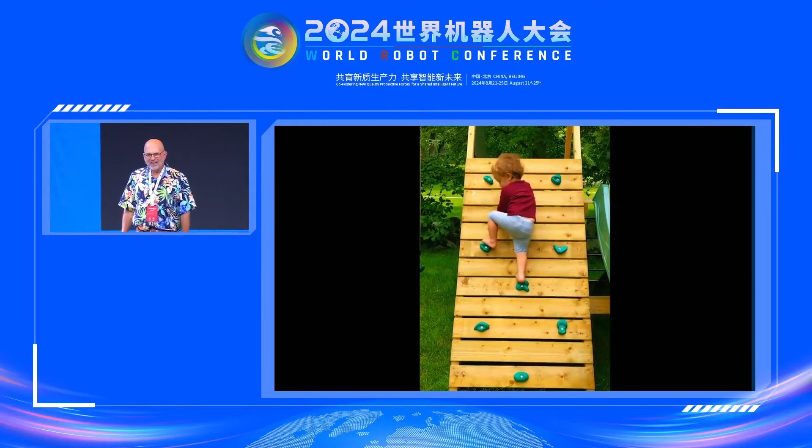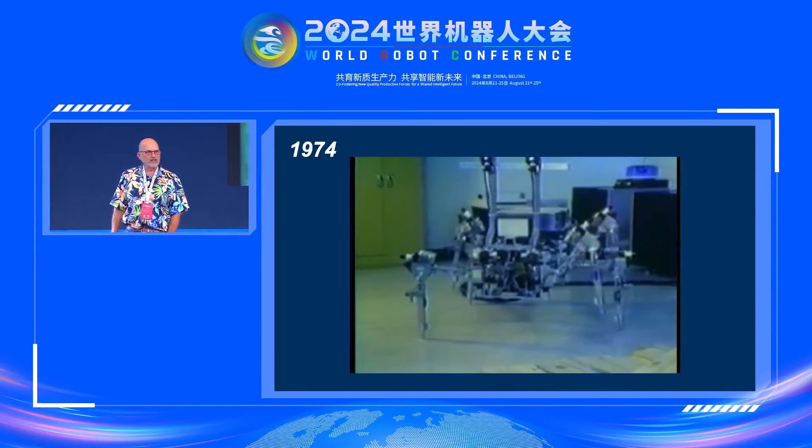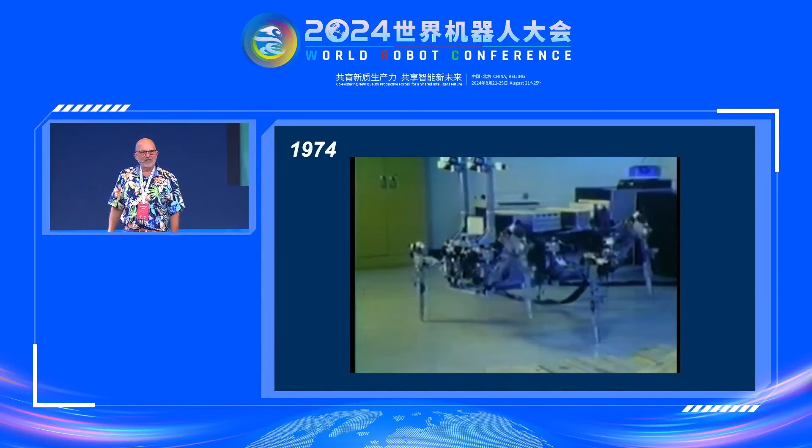I got started about 50 years ago, and I went to a conference when I was still a graduate student and saw this robot, and it's an inspiration. It was an inspiration not because its mobility was so good, it's because it was so terrible. And I looked at that robot and said, wow, they have it all wrong.

Because animals fly through the air, they don't balance statically. Animals have kinetic energy when they move. They don't limit their speed so that that's not a factor.

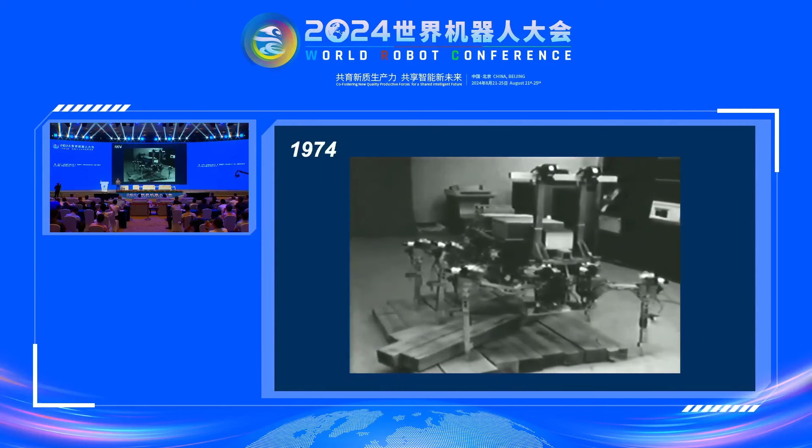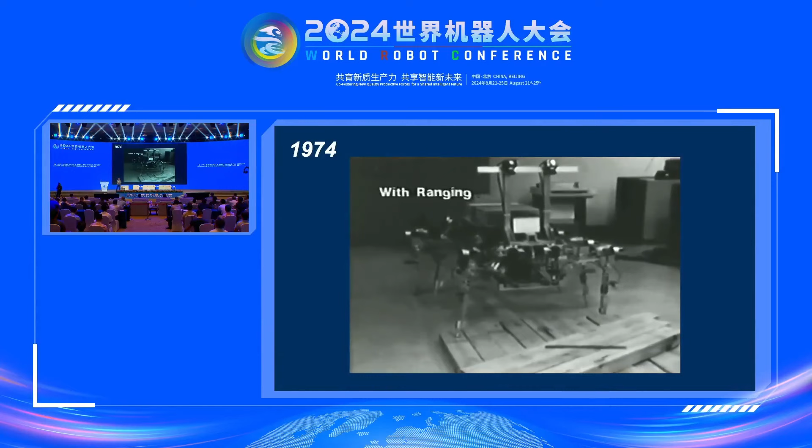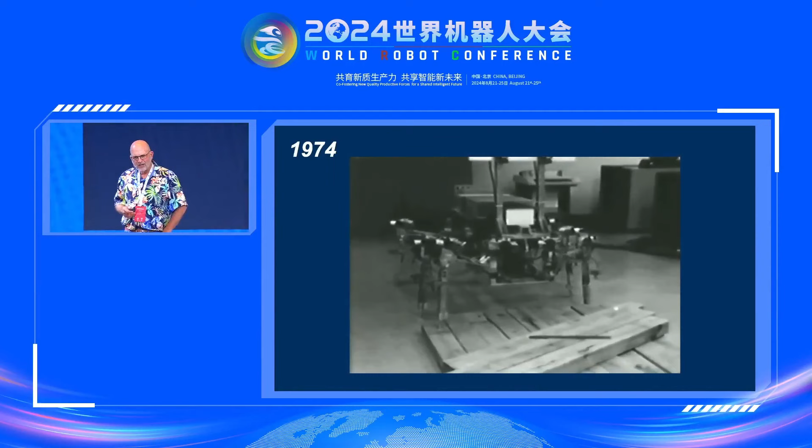And I thought, well, maybe having 6 legs and 18 joints was too much of an impediment. So I decided, I'm a little bit of a contrarian. A contrarian, if a contrarian hears white, they think black. If a contrarian hears up, they think down. So I thought, okay, 6 legs, 30 million possible gaits. Maybe we should make machines that just have 1 leg.

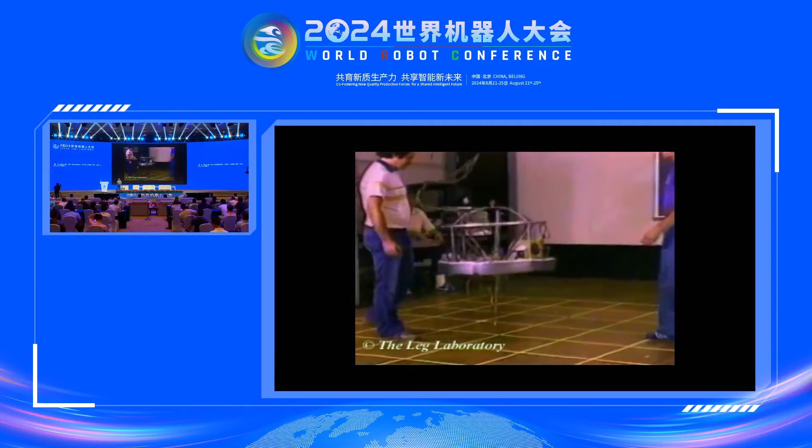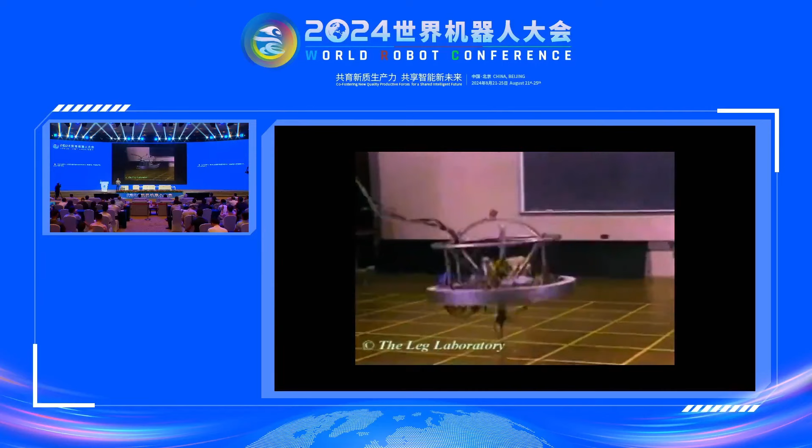With a machine like this, you can't avoid balancing. There's only 1 gait, so you don't have to think about how to coordinate the behavior of all the legs in order to get those gaits. But you do have to think about balance and dynamics and control. And that's what we did here.

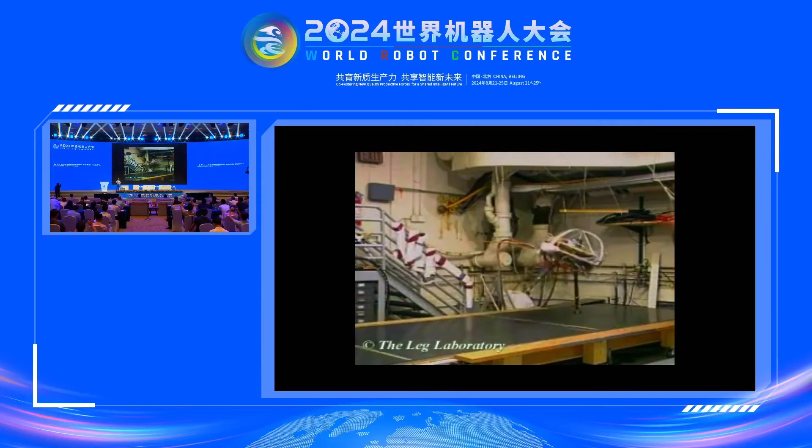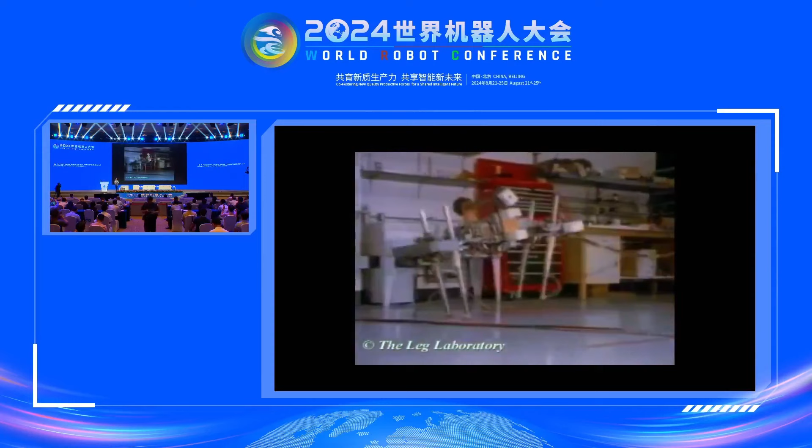It turns out that if you can make a pogo stick balance, you can make a 2-legged pogo stick balance, do some tricks, and you can make a 4-legged robot that has dynamic behavior. This was back in the mid-1980s, the early 1980s. Of course, there's hoses, there's an off-board computer in the next room because we didn't have the integration, the miniaturization that we have today. But we certainly were able to get at some of the fundamentals of what locomotion in a dynamic system could be.

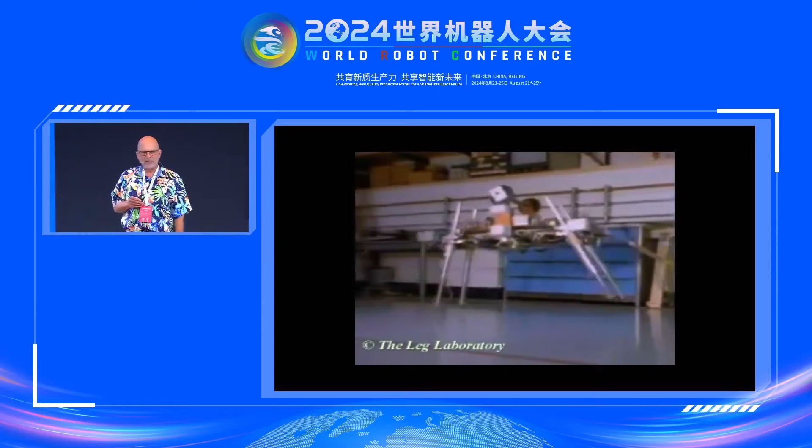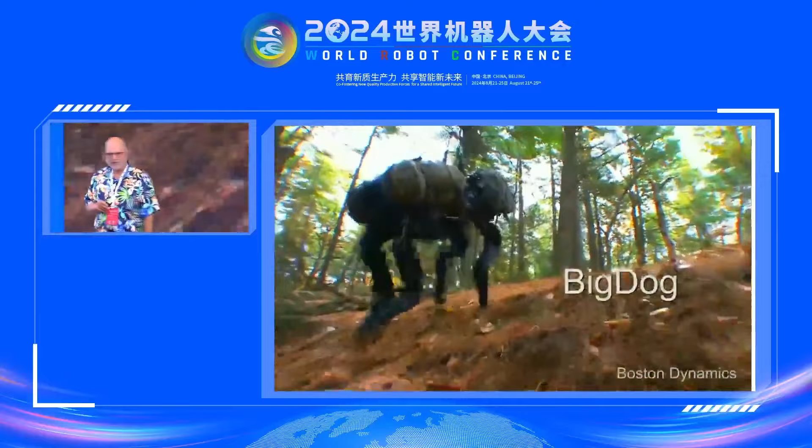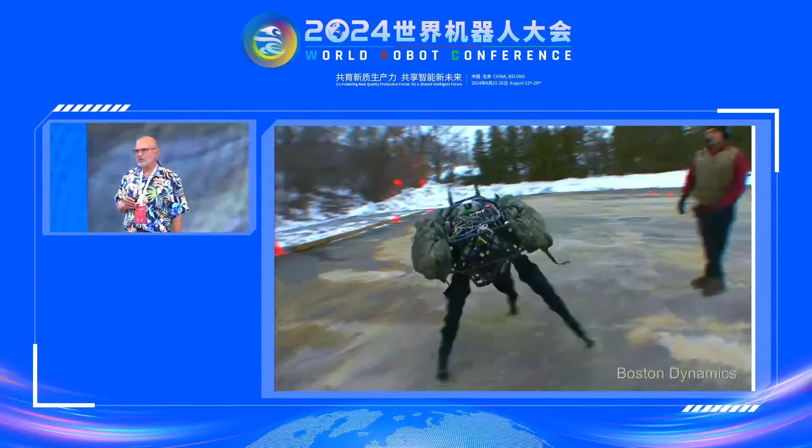And I think those ideas have powered us ahead for the intervening years. Most of you are probably familiar with BigDog. I'm not going to really talk about BigDog today other than to show this one clip. But it's a robot that doesn't have pogo stick legs, but it uses many of the same principles and ideas. Even to this day, we're using some of the ideas that came out of thinking in a contrarian way. I think there's lots of opportunities for contrarian thinking in taking robots the next step.

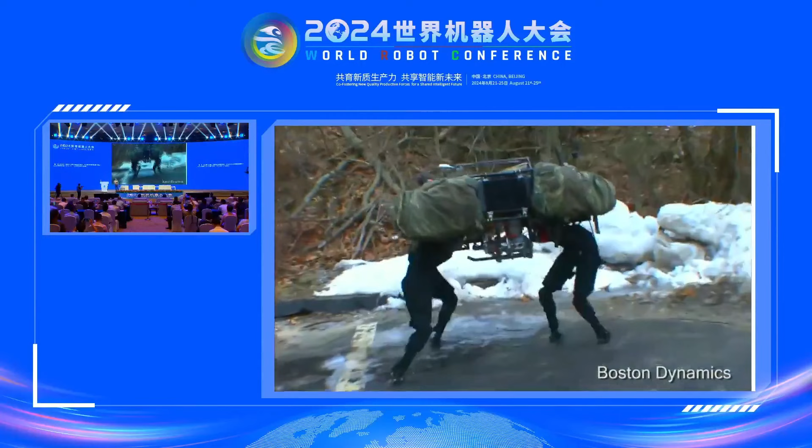So up until recently, almost all the work I did focused on what I call the athletic intelligence of robots. That means controlling the physicality of the robot, keeping it balanced if it has to balance, controlling its energy, giving it mobility, having real-time interaction with the world and with obstacles or adversaries.

But obviously for human beings and for animals, there's another aspect to our intelligence. And I think we could simply call that cognitive intelligence. You know, we think of cognitive intelligence as happening in our heads, doing things like making a plan.

I had to go to the airport in order to take my flight to come to Beijing. I knew that the traffic was going to be busy, so I had to leave an hour for that, had to arrive at the airport 2 hours early. Anyway, you can take a situation like that and use your head. You don't have to use your body to make a plan like that. Just you sitting here and listening to me talk, you're using your cognitive intelligence to understand the words I'm saying or the interpreter's words, and then relating them to things you know about in your lives.

About 2 years ago, I started a new organization called the AI Institute that's committed to combining athletic intelligence with cognitive intelligence. At the time I was proposing this, it was before ChatGPT's impact on all of our thinking in the world. So I don't know if we're catching the wave or being drowned in the wave of excitement about foundation models and LLMs.

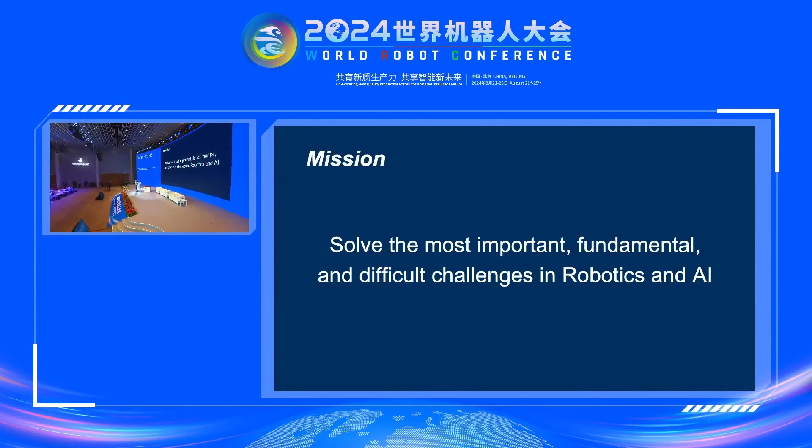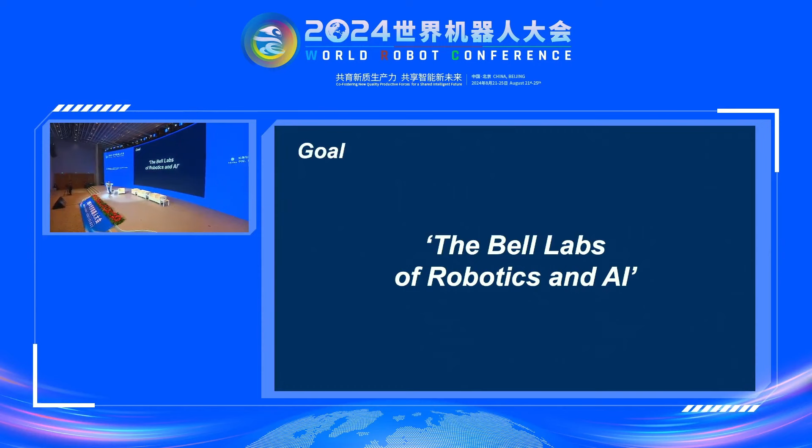I don't know if in China Bell Labs is very popular, but in the United States, everybody thinks of Bell Labs as a place where you're doing free-ranging thinking about the future and how to develop technology that gets you to the future. And I would love for the AI Institute to become that for robotics and AI.

We're focusing on 4 areas: athletic intelligence, like I've described and you've seen, cognitive intelligence, and hardware. I think it's unfortunate that for many people, all the focus is on computing, algorithms, and learning, and there's a kind of ignoring of how important hardware is. I don't think that's so true here in Beijing, China, but I think it might be true across the board with current thinking. So we have a strong focus on hardware as well as those other things.

And in today's day and age, ethics in society - how robots are going to fit in, what people's fears are, trying to make those fears be reasonable - I think is an important thing. So we have a group at the AI Institute focusing on that as well.

We have a lot of projects, and I don't have time to go through them all, but I'm going to give you a little sampling of the things we're working on.

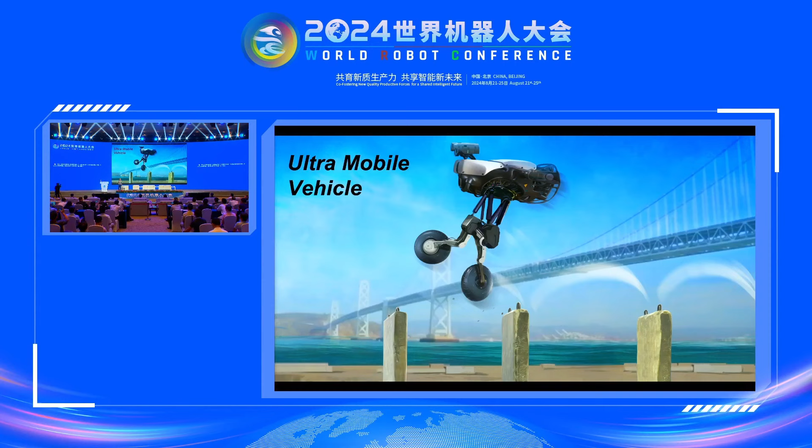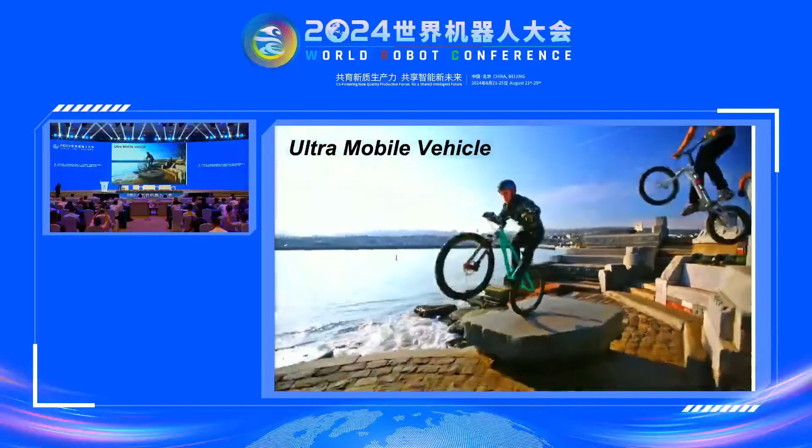One thing that's mostly in the athletic intelligence category is building an ultra-mobile vehicle. And the inspiration for this, again, comes from human behavior. It's really remarkable what a human can do with a bicycle. I know you're supposed to just pedal them and ride, but you can jump them and bounce them and use your body weight and balance and use your perception to plan the motions you're doing. So this is our aspiration, to be able to do this kind of maneuver.

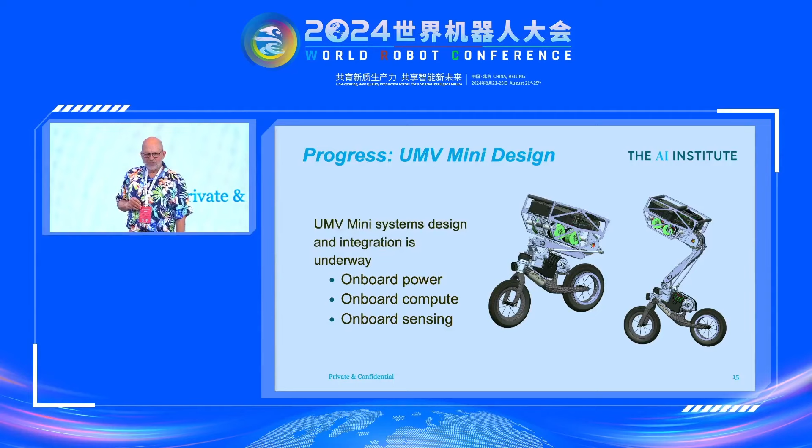And we're just getting started. In fact, most of the stuff I'm going to describe at the Institute, because we're only 2 years old, is at the fledgling stage, not at the high-performance stage. We've designed some machines that let us explore this, and here's some early footage of these machines.

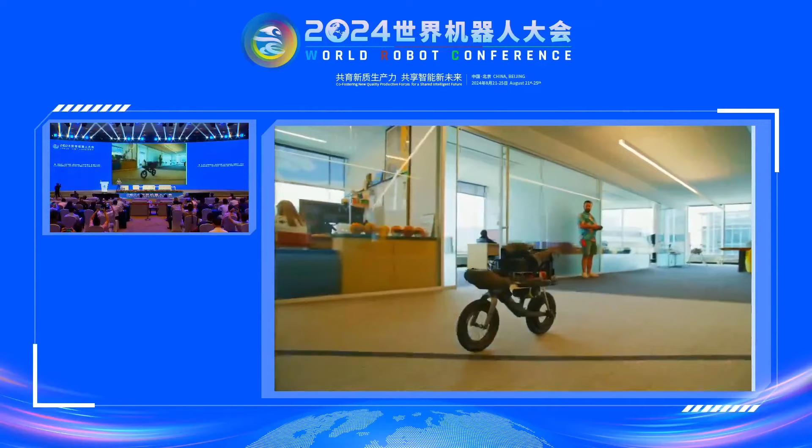Here's a little bicycle that can balance itself. We actually got a stock bicycle and added our own computers and actuators in order to develop behavior of this bicycle. So this is the balancing part of the bicycle.

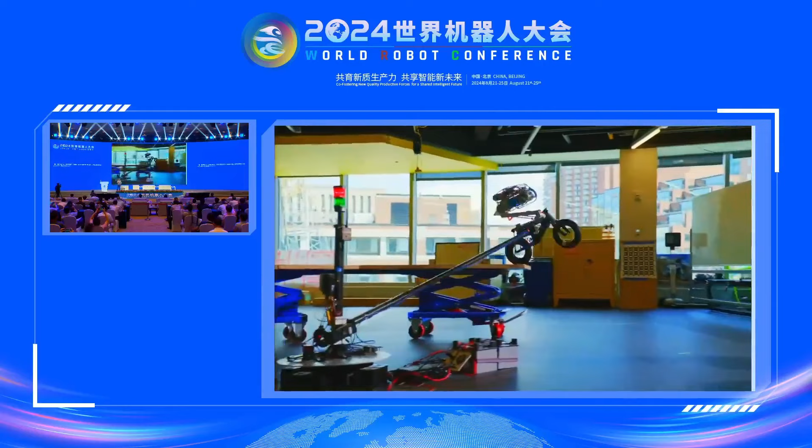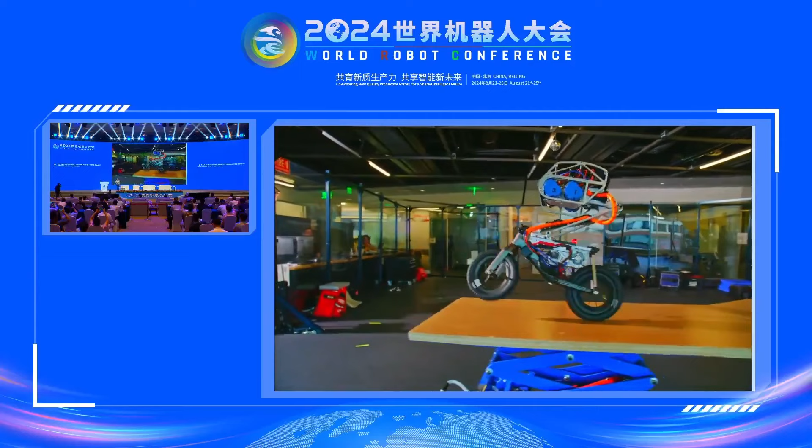But we also want to make it possible for it to jump. So here we've been experimenting with the jumping part of the bicycle. There's a mechanism attached to the body, which you can think of as the body weight of the person riding the bike. We can throw that into the air or use it to absorb the energy of flight as the bicycle goes. We're also working on a 3D version of jumping, and eventually we'll take all these pieces and pull them together in order to make an ultra-mobile vehicle.

Obviously, there's a perception component and a planning intelligence component that have to be combined with those in order to make progress. We have another project called HALO, which stands for Human Athleticism, Learning, and Optimization.

This is being run by one of our people who comes from Marco Hutter's lab. Marco's sitting in the second row there, who is one of the pioneers in dynamic control and learning in robots. And I'm really excited about this project.

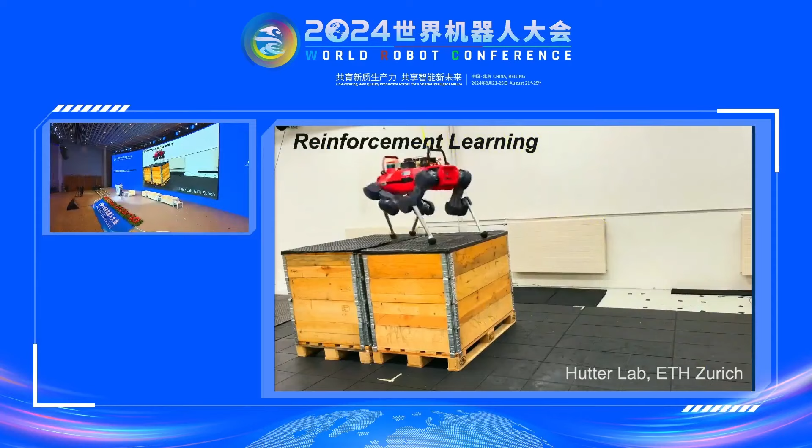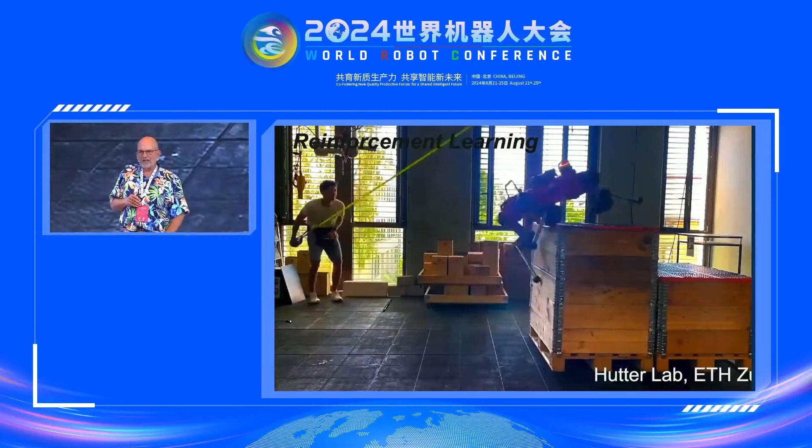This is a clip from Marco's lab that was done separate from the AI Institute, where reinforcement learning is used to control the behavior of this robot. And what I find so exciting is that the whole body of the robot is available to use in getting mobility.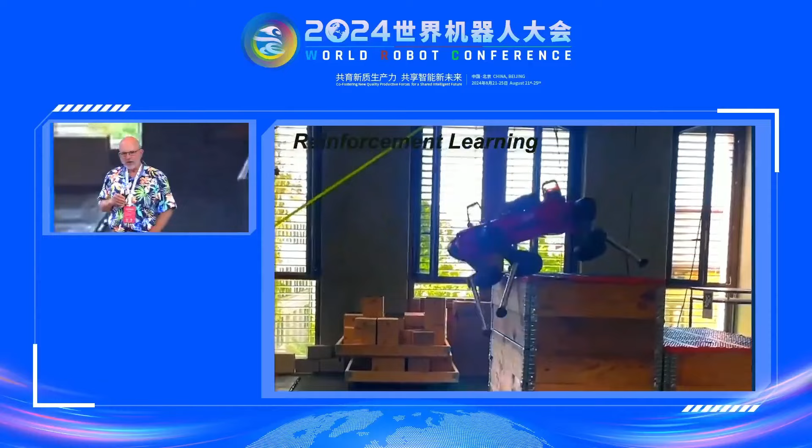It's not just the feet and the hands, if it had hands—it's using perception. And this was all trained in simulation using reinforcement learning. This robot can even go on rough terrain that's very irregular, using what it learned in a simulated world. In a second, you'll see how you can use massive simulation in an environment with various terrain features to build up the robot's capability to handle those features.

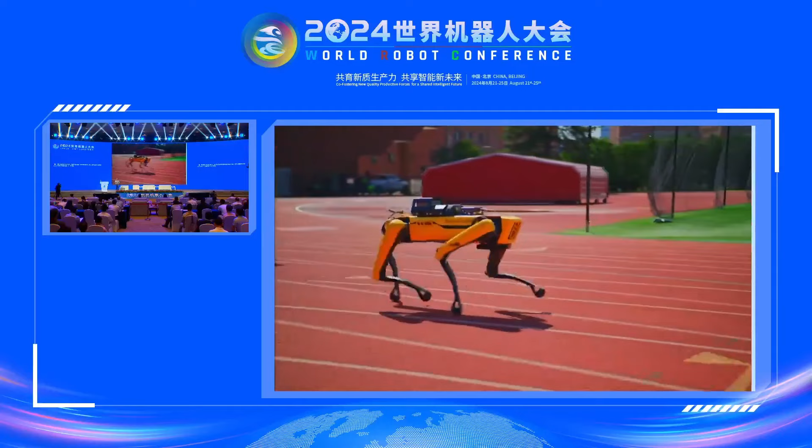We recently applied these techniques to the Spot robot. We got Boston Dynamics to open up a new low-level API for us that allows direct control, and we used the same reinforcement learning techniques to get this robot to run about twice as fast as the release software that's in Spot. I believe the software for this is all open source now, available through NVIDIA. If you want to know more, come ask me afterwards.

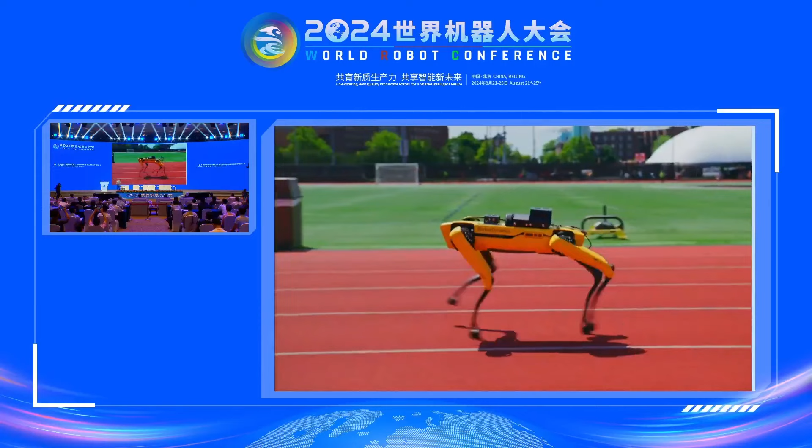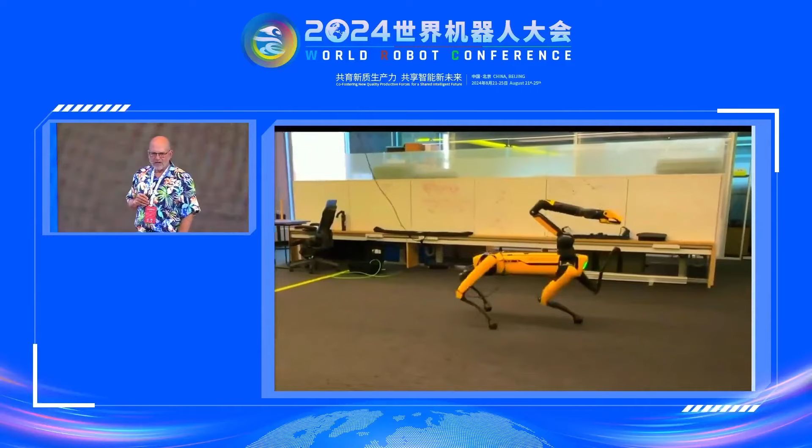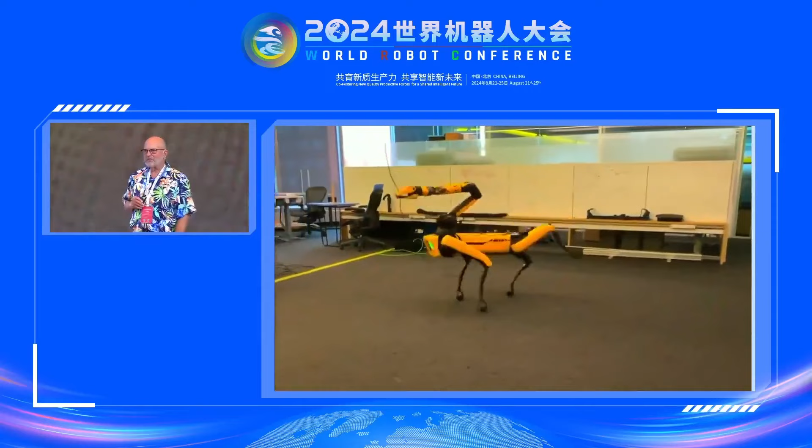Here's a different gait. We did a couple of experiments where the gait was fixed and we just optimized speed, but we also let the gait be flexible. Here's a case where we told the robot we wanted it to walk with 3 legs, not 4, so it could use its free leg to do manipulation. We haven't done manipulation yet, but I think it's really exciting that a 4-legged robot could actually do manipulation if you freed up its legs, even if it didn't have an arm.

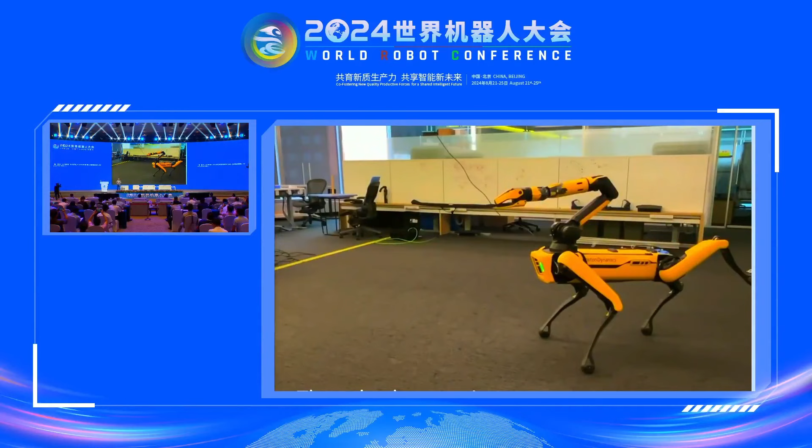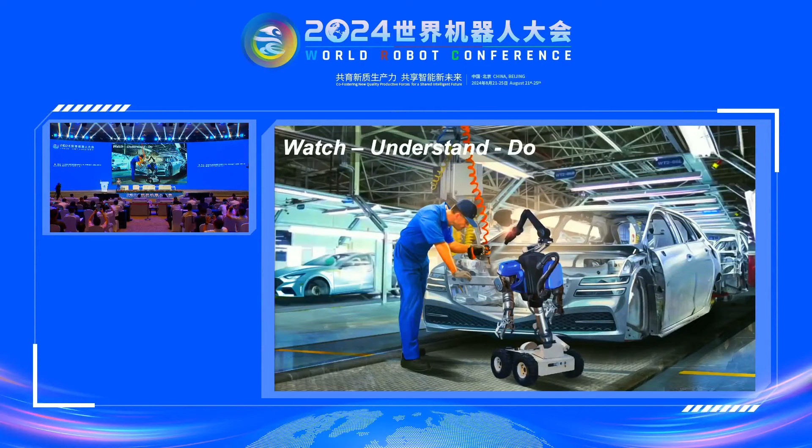I can remember a time at Boston Dynamics when we had a 4-legged robot and we could just barely get it to walk on 4 legs. So things have come a very long way since then.

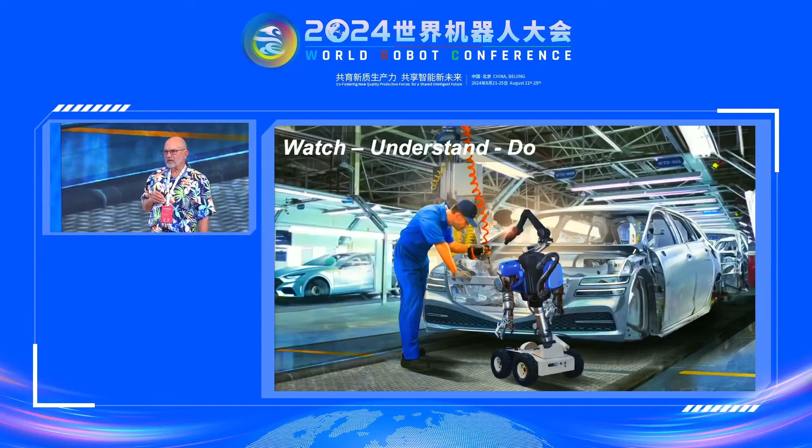One of our cognitive intelligence projects that we're working on, we call Watch, Understand, Do. The idea is not to have a room full of sophisticated programmers program the robot's task, but to let the robot watch a human being do the task in detail, understand what they're seeing, figure out what skills are involved, and then do the task themselves. Here's the robot doing the task.

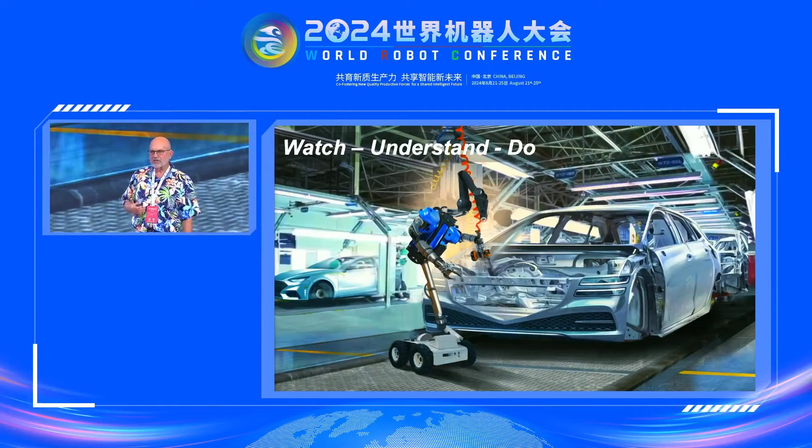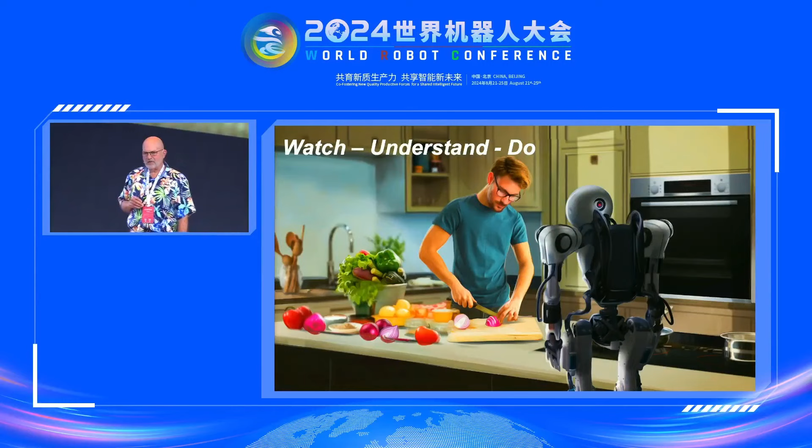Now, this is still science fiction, but I think with a combination of learning, foundation models, plus athletic skills, it's possible to make progress on a project like this. That previous slide showed an industrial application, but here's a domestic one, or at least a concept of a domestic one that could use the same kind of approach.

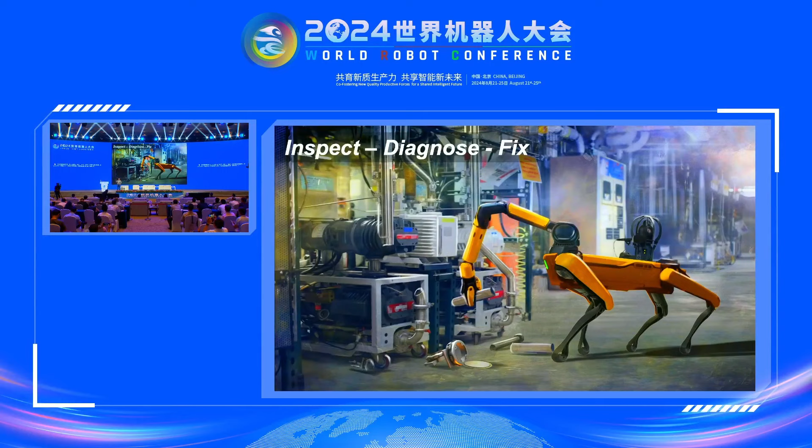We have an ethics and policy group whose mission is to collect real scientific data about some of the ethical issues. I think too much of the conversation about ethics and policy is driven by the media and by the fears—the Hollywood fears, the movie-making fears about what robots might be. I think there's an opportunity to learn more about what that could actually be.

I'm going to skip this because I'm low on time, and I want to give you a little update on Boston Dynamics.

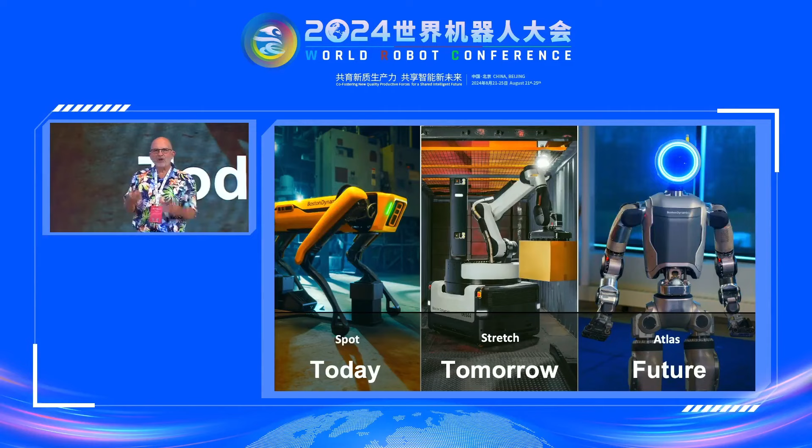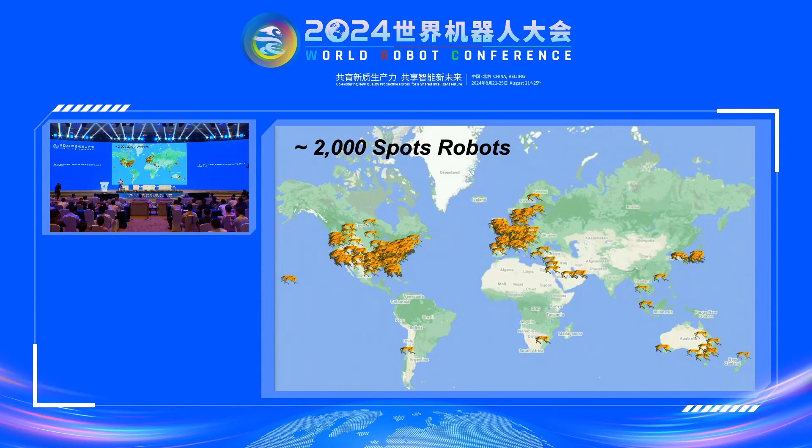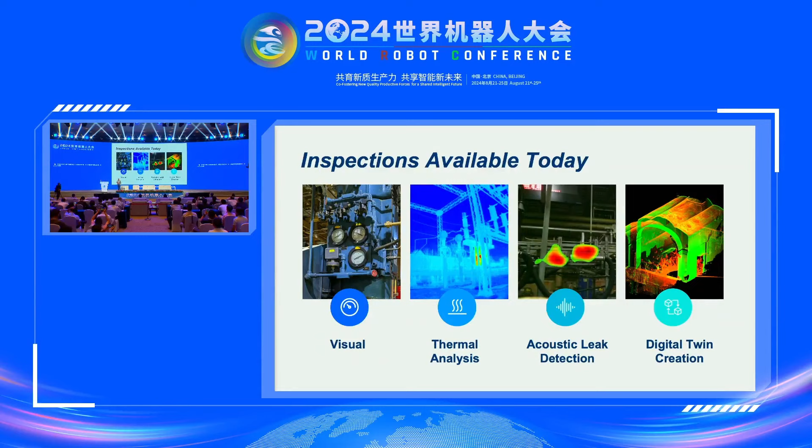At Boston Dynamics, they're working on 3 robots: the Spot robot, which is an ongoing product; the Stretch robot, which is in testing but will be a product very soon; and Atlas, the humanoid robot, which is probably most tuned in to this audience. There are about 2,000 Spots out there around the northern hemisphere of the world—not so many in the southern hemisphere, although there's some in Australia. They're being used for a variety of inspection tasks, research and development, digital twin creation, and things like that. It's really remarkable the wide variety of things people have thought up to do with these robots.

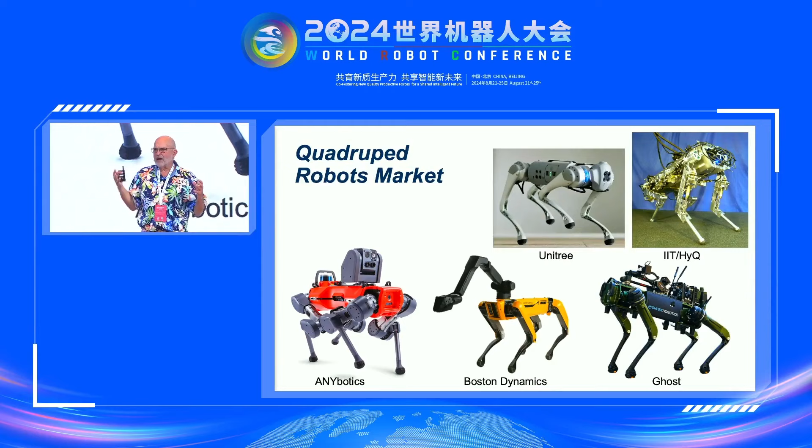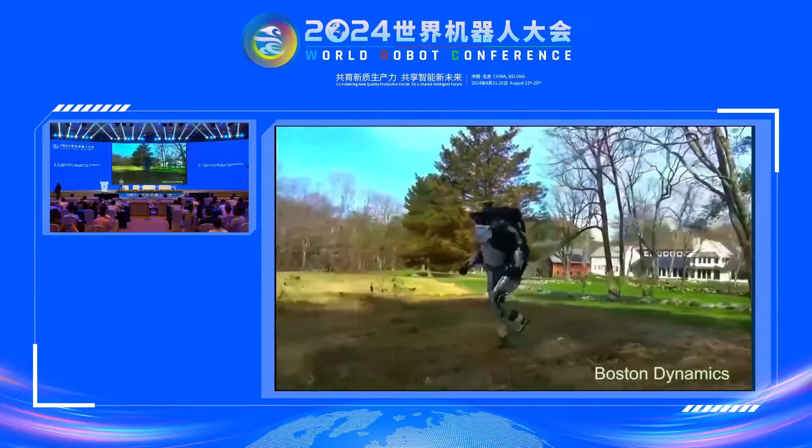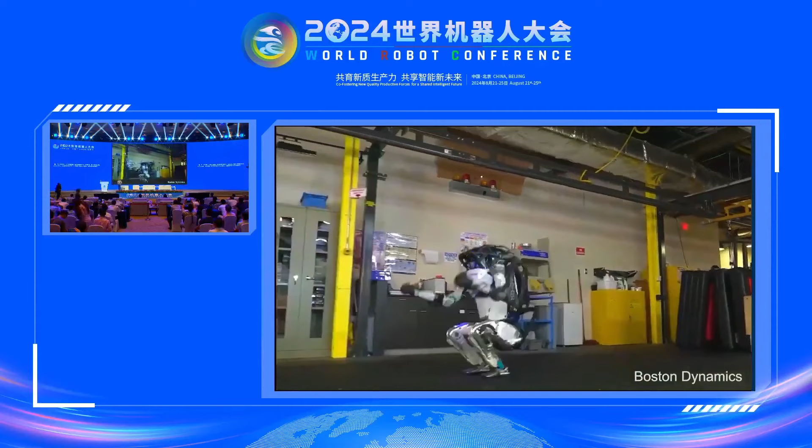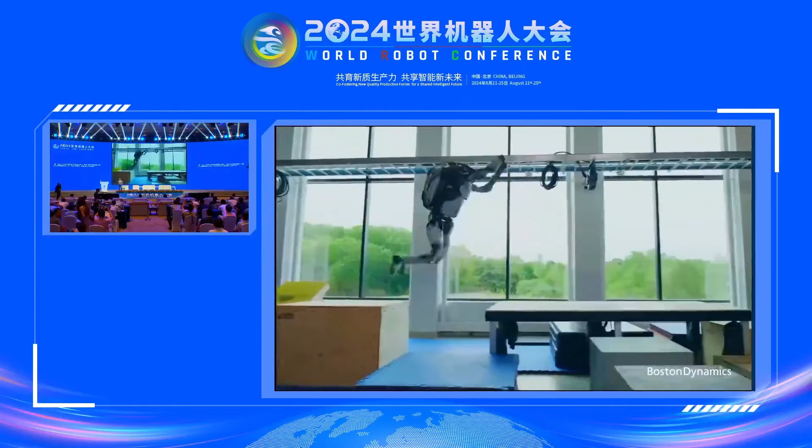We've been working hard on Atlas. Atlas is a humanoid robot developed at Boston Dynamics. This is footage you've probably seen before if you've followed us—it's a very athletic robot with a lot of skills. This one is hydraulically powered; the company just showed a small clip of the next generation, which is electrically powered. I'm very excited about the level of dynamic control used—this relies on model predictive control for much of its behavior, although they're starting to go beyond that.

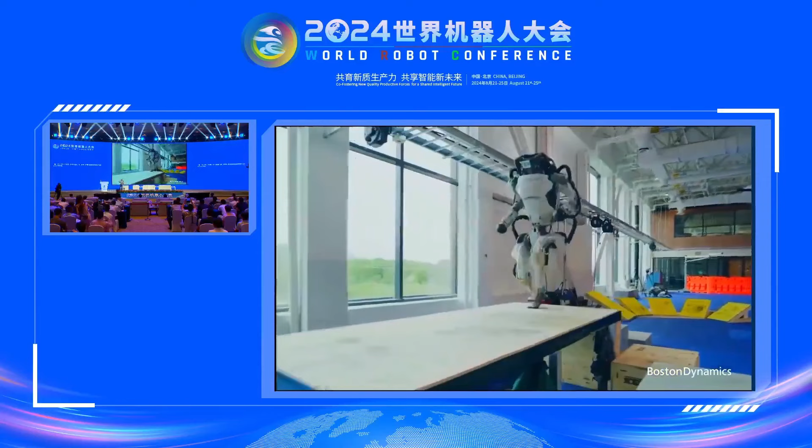Very recently, they've developed the performance of the model predictive control to a very high level, and it's just amazing the level of stability that they've been able to achieve in this robot. I'm really impressed with how it can move and maintain its balance.

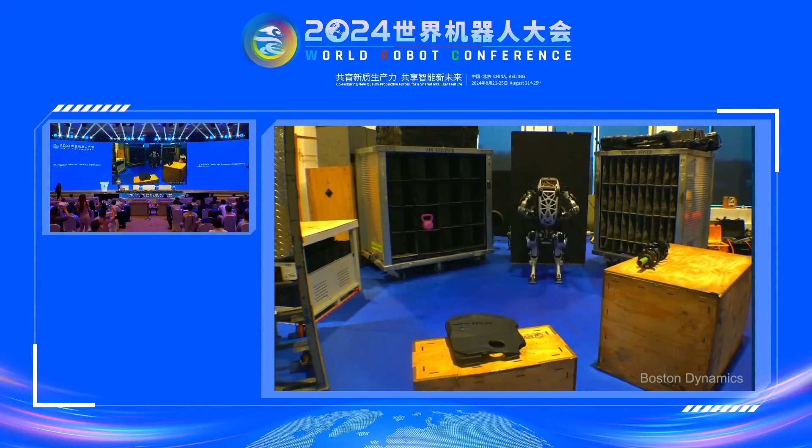But they've also been working on putting together a more complex sequence of tasks like the one shown here, where the robot's using not only its mobility, but its ability to use two hands to handle objects, some of them heavy objects like this wheel rim. It has a vision system that's used both to coordinate its interaction with the parts, but also for part of the navigation, so it can move through a space like this.

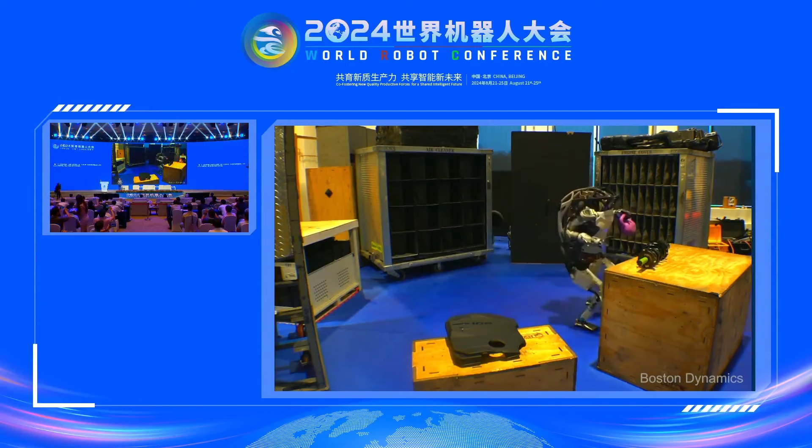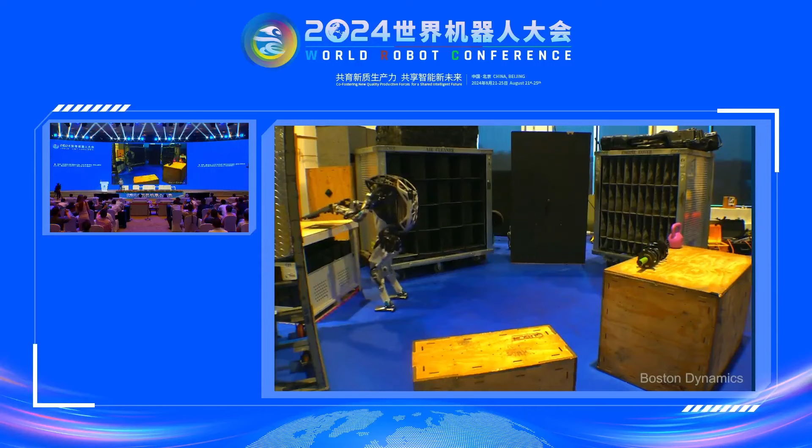Any of you who have worked on real robots moving in a space know that to keep the robot coordinated with an environment like this requires a lot of navigation and precision in the things the robot can do. So I'm really excited by this task and some of the others that the robot's been doing. In a second, you're going to see a task where the robot's manipulating those car parts, the struts, and putting them in a position so that they can be used in an assembly operation.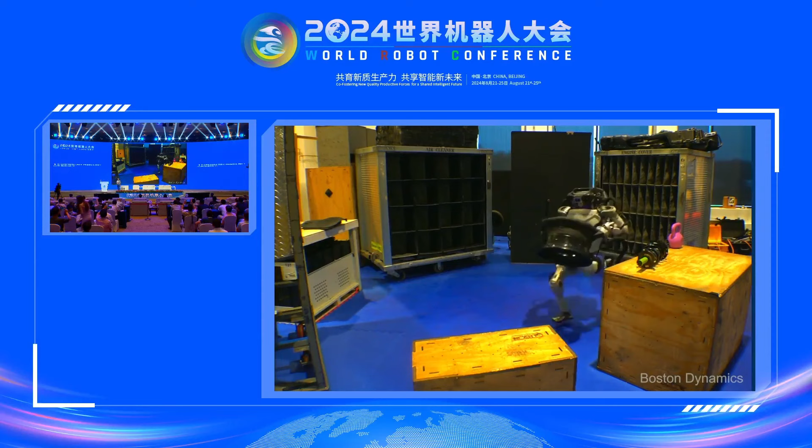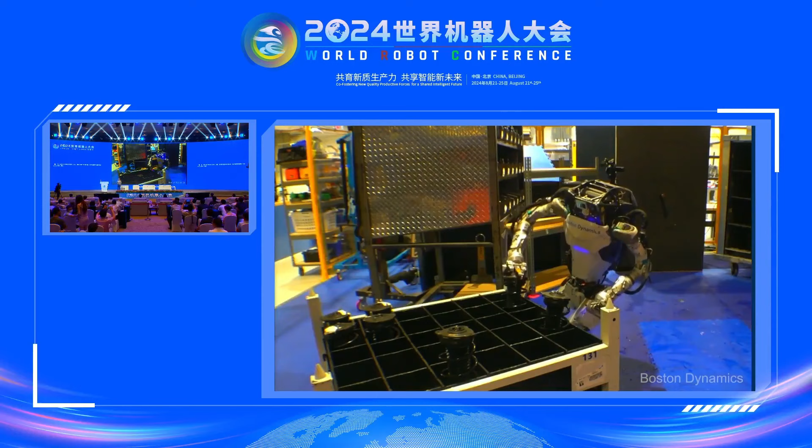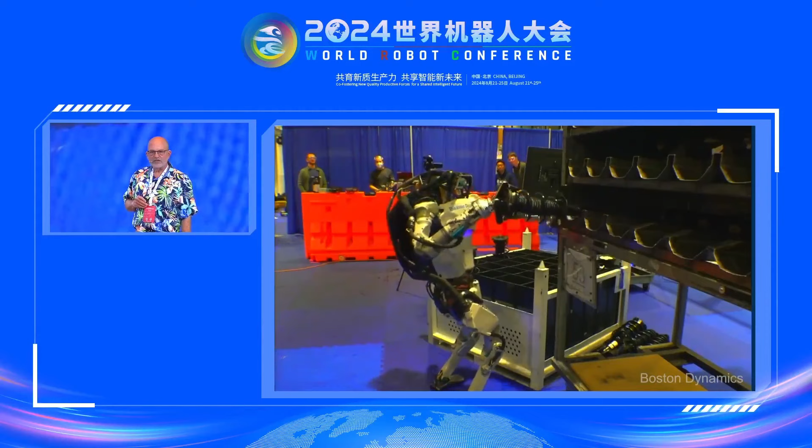Now this is the previous version of Atlas, which is currently retired. There's none of them working, so this work was done over the past year. And the company is in the process of switching over to the new electric Atlas.

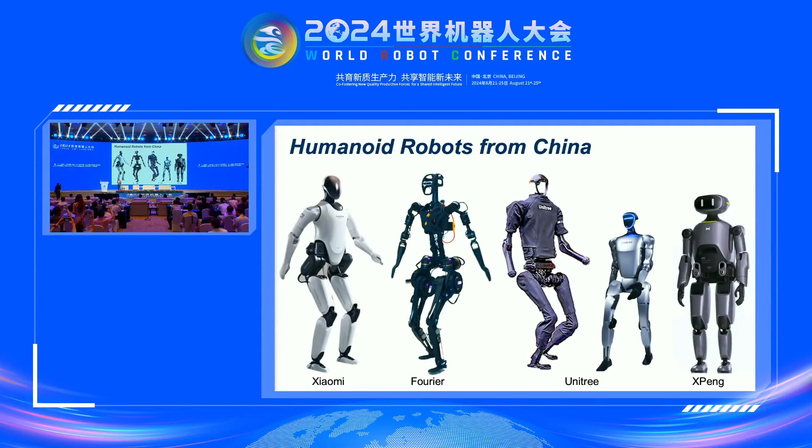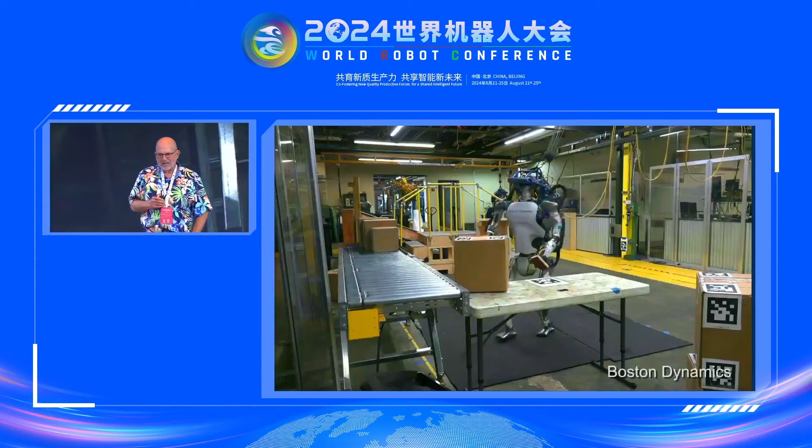But it does raise a question: are humanoid robots a good idea? And I'm going to let that question hang because there's lots of different elements to the question, and I'm just about out of time. I'm going to show one more clip here.

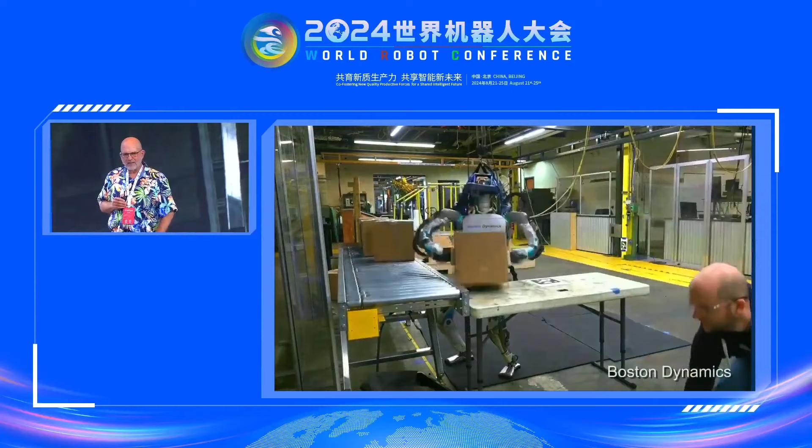This is a time when we said, let's see if we could make the humanoid do some logistics task where it's handling boxes. And it's kind of fun. It can do this. It's using its vision, and you could have a couple of robots working together.

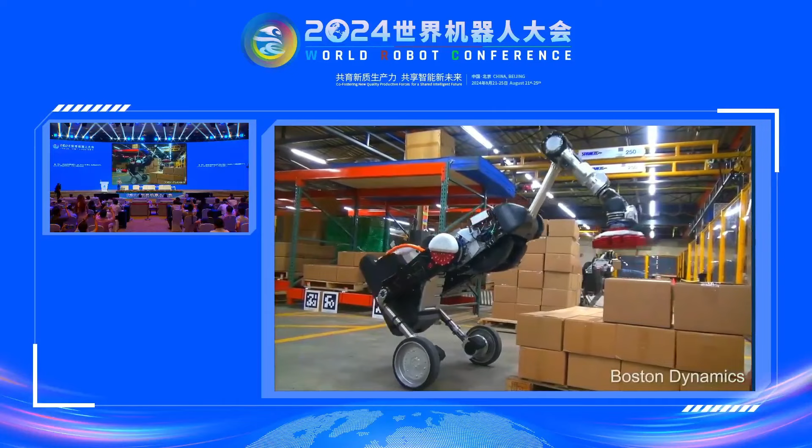But then we thought, well, if we wanted to make a machine that would be lower cost and have higher performance in a real application, you could simplify the machine. It still has some of the aspects of a humanoid, but it's a little bit simplified. And eventually that led us to this robot, a stretch robot,

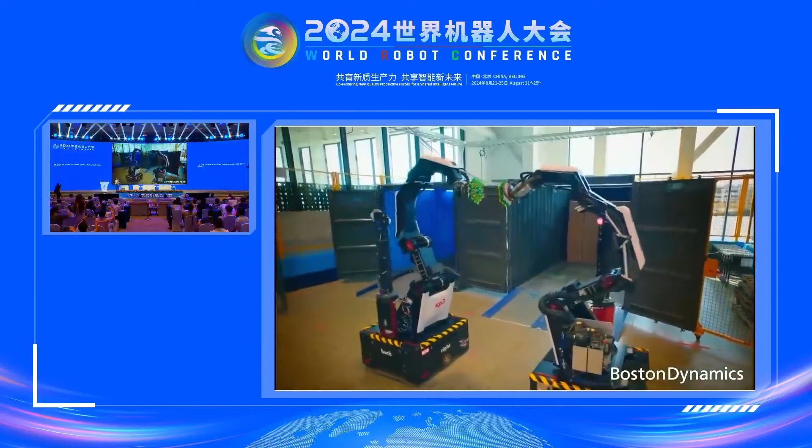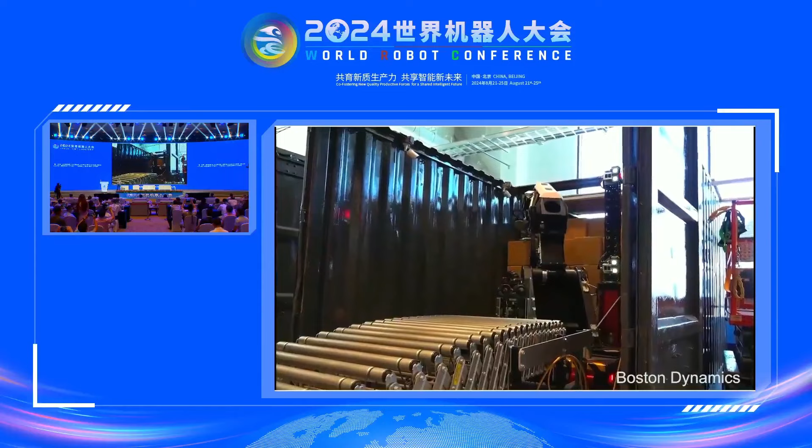which is designed very specifically for unloading trucks. It has a vision system for doing that, and it has a manipulator and mobility for unloading trucks. And it can do pretty much the human rate at very extended times, with a pretty low failure rate.

And we have this at testing in a couple of different companies. It's handled millions of boxes in warehouses, in real warehouses, doing real work. This just shows into the vision system.

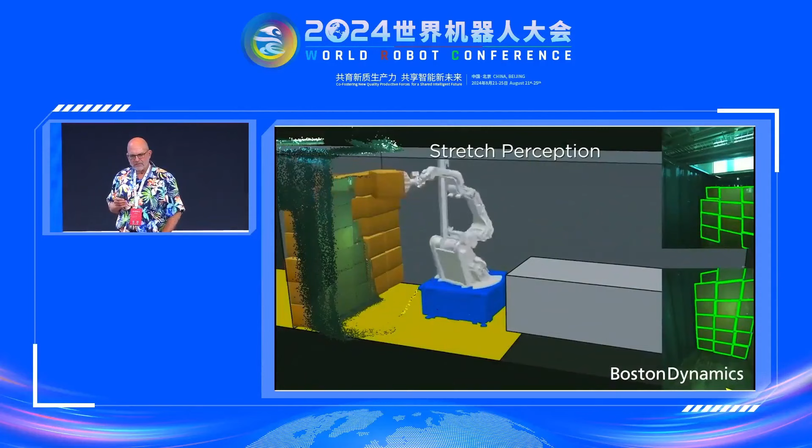So I think the answer to that question of are humanoids a good idea depends on your goals. If your goal is to create the next generation of our dreams of what robots can be and to have them up to human capabilities, that's my dream, then I'd say go for it. Humanoids are a great idea.

If you're trying to make money next year or the year after and you want to commercialize something at scale, I think that there's lots of ways at getting solutions. It might be humanoid, but I think that there's lots of other ways you could go at it.

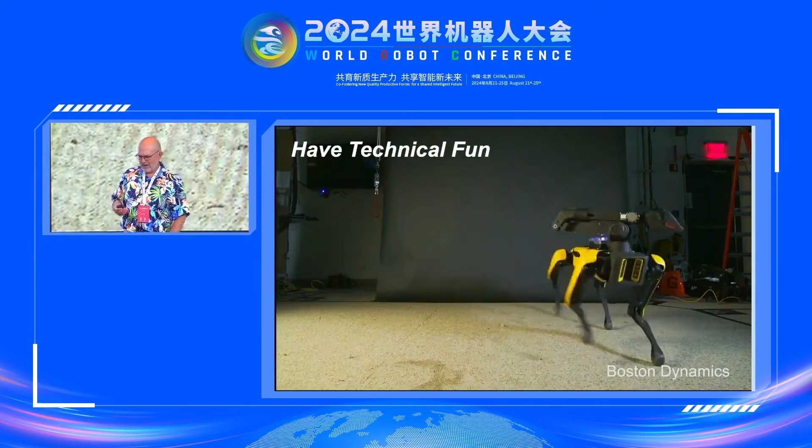I know I'm over time, but I'm going to indulge myself in just showing one or two more videos, and that is about the culture of robotics. For me, there's a number of elements, and I don't have time to go into all of them, but one of them has to do with my love of robotics, and that's to have technical fun. And I think one way to do that is to make the robots express themselves, to perform in the world.